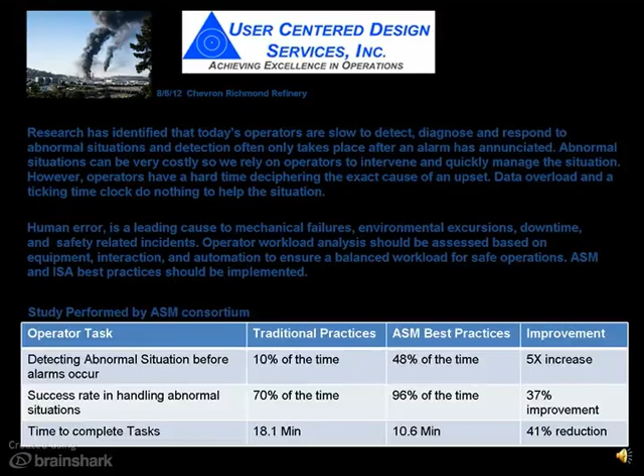The operator workload study is a tool that allows a client to measure the operator workload to identify where job duties are unequal and should be reorganized, consolidated, or new duties assigned. It also identifies management systems that are not meeting best practices.

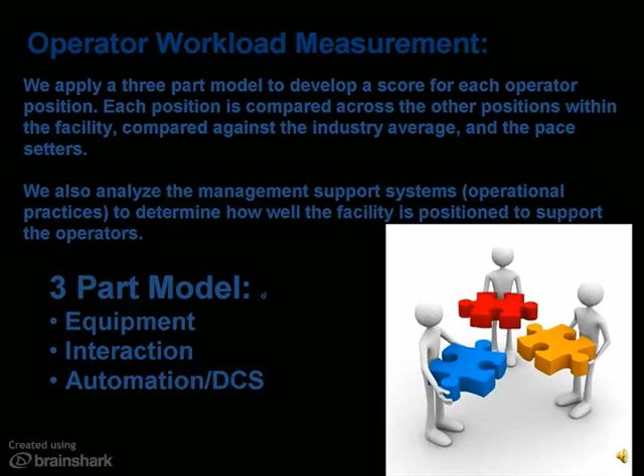We apply a three-part model to develop a score for each operator position. Each position is compared across the other positions within the facility, and then compared against the industry average and the pace setters. We also analyze the management support systems to determine how well the facility is positioned to support the operators. Our three-part model consists of the equipment complexity, the interaction, and the automation and DCS system.

The equipment complexity score. The operator is impacted by the type of equipment being operated. A highly dynamic reaction process is much more difficult to operate than a slow-moving tank farm. To account for these variations, we use our equipment model and assign a score to each piece of equipment. A simple pump or heat exchanger has a low score, while compressors have high scores. The score also takes into consideration the additional maintenance and failure potential of the equipment.

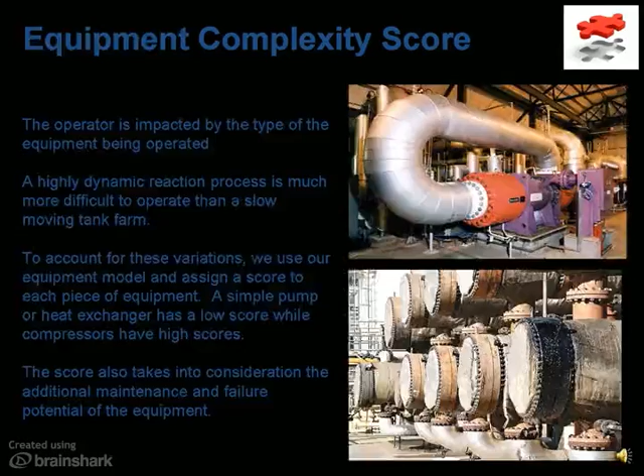Interaction complexity score. The operator workload is significantly influenced by upstream and downstream areas. An area that has upstream and downstream tankage with stable utilities is much easier to operate than one that has hot feeds, sends products downstream, and is highly dependent on dynamic utility systems.

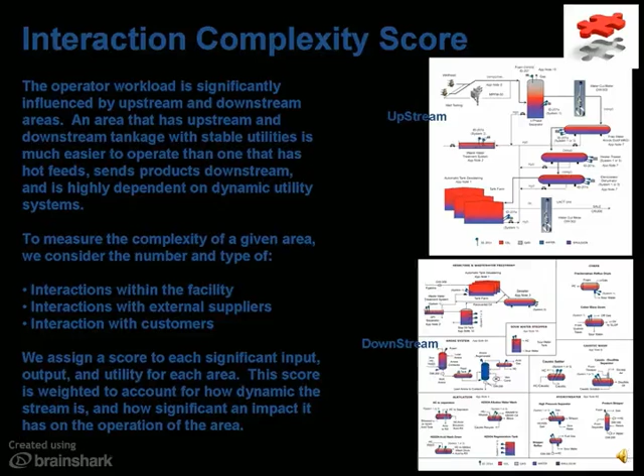To measure the complexity of a given area, we consider the number and type of interactions within the facility, interactions with external suppliers, and interaction with customers. We assign a score to each significant input, output, and utility for each area. This score is weighted to account for how dynamic the stream is and how significant an impact it has on the operation of that area.

Automation complexity. The control system's complexity has a significant impact on the operator workload. Poor control system performance can come from poor alarm management practices, poor console graphic design, navigation, and poor tagging conventions, advanced control that does not promote stability during upsets, poor control valve maintenance, poor PID control or loop tuning, nonlinear control with linear algorithms, a badly trained operator making poor moves.

To determine the impact on the operator workload, we create KPIs and calculate a score using the following data: controller changes or operator moves, number of standing alarms, alarms per minute during upsets, steady state alarms, chattering alarms, the number of operator changes, the number of controls that are not in their optimum mode, the total number of control loops, and the total number of configured I/O.

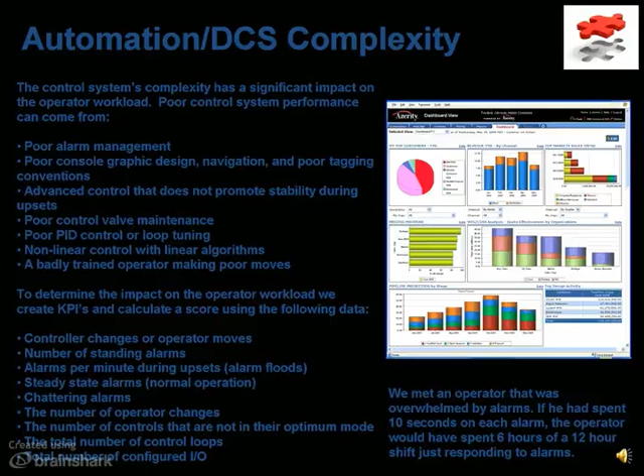We also go through an interview process where we interview management, supervisors, engineers, and operators. This process helps us to identify other areas that impact operator performance. Operators are interviewed at their console stations. We confirm the data we've collected and ask for insight on anything we might have missed. We use this time to understand the culture and operating practices and procedures.

The input received during the interview is compared against today's best practices to determine how the site is positioned to support the operator workload. Both the numeric scores and interview data are compiled into the final report. All three scores from the equipment, interaction, and DCS automation assessments are combined to arrive at a numerical rating for each position. 11 operator positions are shown below.

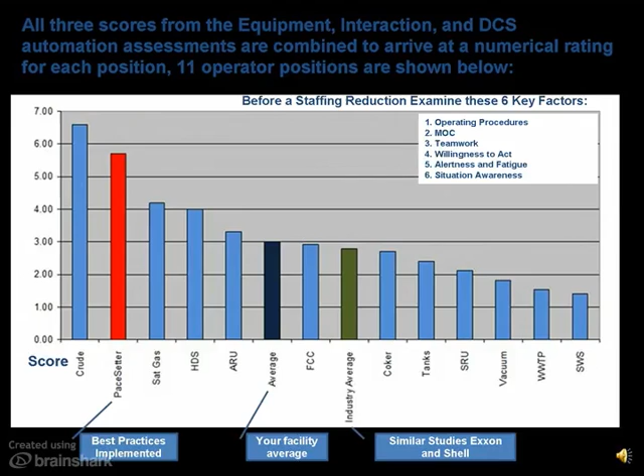A few things stand out in this graph. The dark red bar shows you the workload of the industry pace setter. They've implemented best practices. The green bar shows you the industry average, allowing you to compare your operators against others within your industry. The dark blue bar shows your average score. This allows you to easily compare your operators' workload against the pace setters and the industry average.

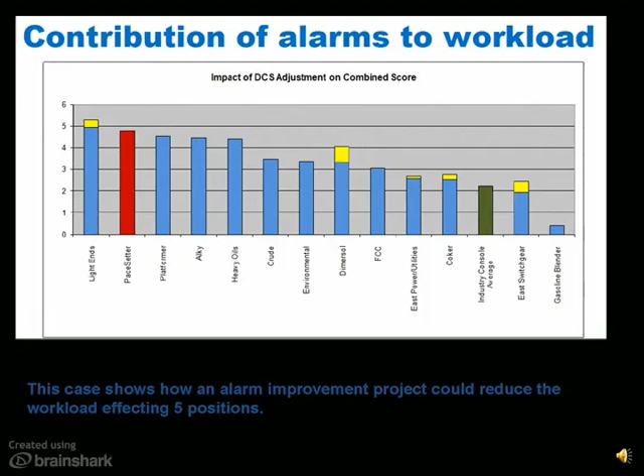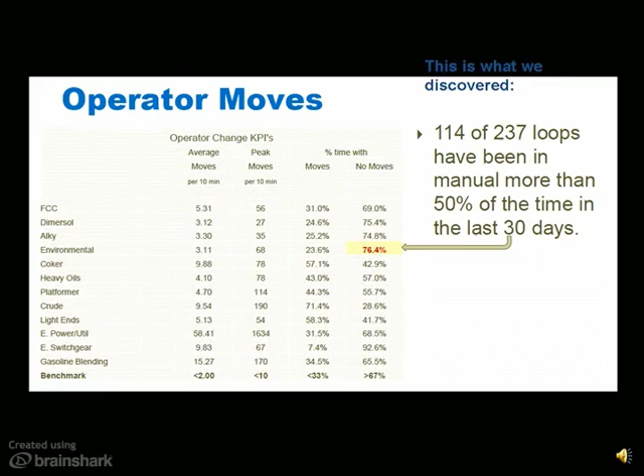We also look at how the alarm system contributes to the operator workload. This case shows how an alarm improvement project could reduce the workload affecting 5 operator positions. We also look at the number of operator moves for each operator position. In this particular case, we identified that 114 of the 237 loops have been in manual more than 50% of the time just in the last 30 days.

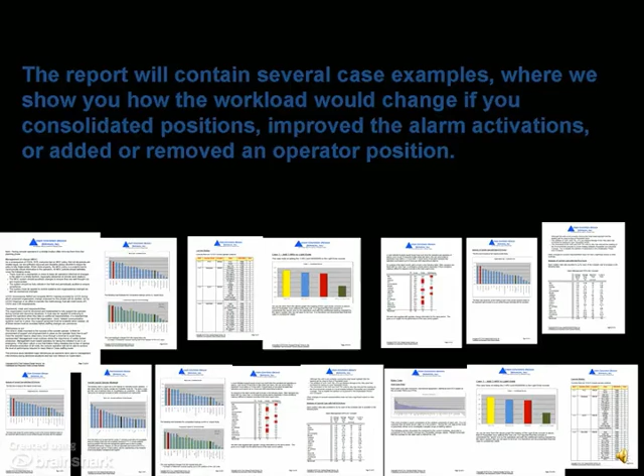The final report will contain several case examples where we show you how the workload would change if you consolidated positions, improved alarm activations, or added or removed an operator position. Once we receive the OK to start, a full data collection plan will be provided to you. It consists of alarm and operator event data, as well as P&IDs for equipment counts or PFDs, and organization charts. We can help with the data collection activities.

Next, we schedule times for all the interviews. It is important that these are scheduled in advance in order to be efficient with our time on site. Once we have the data, 2 of our operator project managers will arrive on site, usually for 1 week, depending on the size of the facility. We will perform the interviews based on the predefined schedule to determine additional duties and tasks beyond those normally accounted for in the model. Then we go off-site to develop the final report. It is highly recommended that we schedule a return site visit to deliver and review the final report with your team.

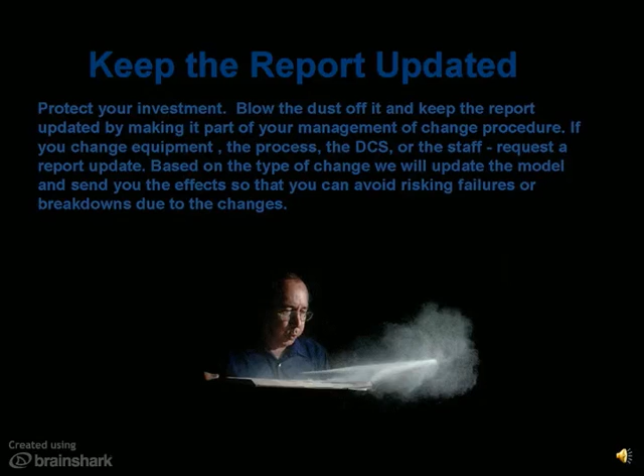We highly recommend that you keep your report updated. If you change the equipment, the process, the DCS, or the staff, request a report update. Based on the type of change, we'll update the model and send you the effects so that you can avoid risking failures or breakdowns due to the changes.